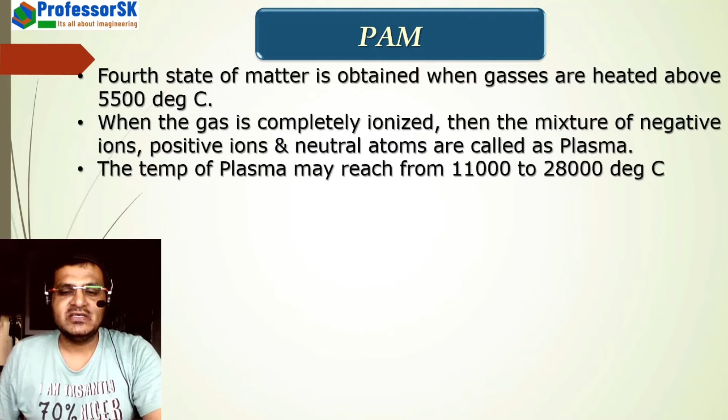So let us see the principle of the plasma arc machining. Fourth state of matter is obtained when gases are heated above 5500 degrees Celsius. When the gas is completely ionized, then the mixture of negative ions, positive ions and neutral atoms are called as plasma. The temperature of plasma may reach from 11,000 to 28,000 degrees Celsius, and this temperature is used for machining purpose in plasma arc machining.

Now let us see the setup of the same. Number 1. Plasma cutting torch. It is a tungsten electrode fitted in a small chamber. Next, tool and workpiece. In this process, tool is made as cathode and workpiece is made as anode.

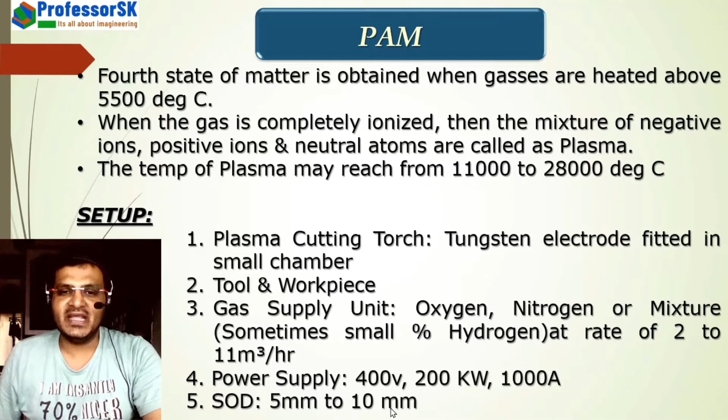Gas supply unit. Oxygen, nitrogen or mixture, sometimes small percentage of hydrogen at rate of 2 to 11 meter cube per hour is supplied. Power supply provided is 400 volts, 200 kilowatt power and 1000 amperes. Fifth, SOD means stand off distance is kept from 5 mm up to 10 mm in this process. This is the constructional setup of plasma arc machining.

Also, sometimes shielding gas is supplied. Now what is shielding gas? Shielding gas is providing a shield to the working area from the atmospheric air. It will create a shield over here and it will cut off the contact with the environmental air. These shielding gas can be noble gases like argon.

Also, circulating coolant water is provided in the nozzle for cooling the nozzle. So if the temperature is reaching up to 28,000 degrees Celsius, then there are chances that the nozzle also may get corroded. So to stop the nozzle from corrosion, cooling supply is provided.

This is the tungsten electrode. As you can see, that tungsten electrode is connected to power source. This is negative terminal and workpiece is positive terminal. In this area, plasma gas is produced, plasma arc is produced, and from this nozzle it comes out and falls on workpiece with a very high pressure.

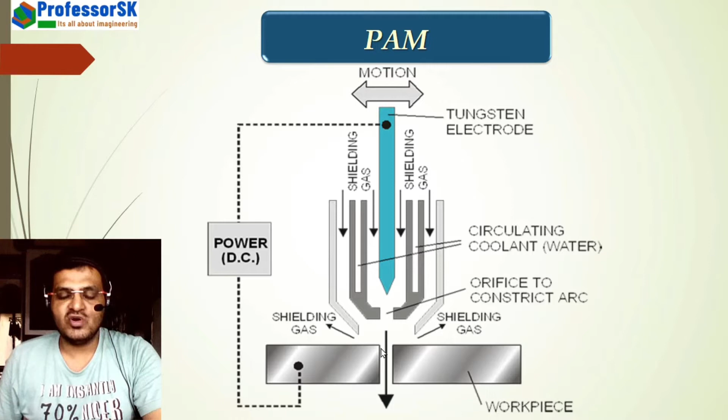Now let us see the actual process of plasma arc machining. When DC power is given to the circuit, a strong arc is produced between the electrode, cathode and nozzle, that is anode. Now you can see that here anode is connected to workpiece as well as it is connected to nozzle. So when the DC supply is provided, what will happen?

The electrons will travel from negative to positive. So it will go from cathode and they all will get allocated in this part of the electrode, tungsten electrode. Now as the voltage and current is very high, the electron will be very much saturated over here and they will try to jump off and go to a positive charge. Now what is the very next positive charge available over here? Yes, that is nothing but your nozzle, torch. So electrons will jump from here and it will go to the nozzle.

Meanwhile, what is present over here? There is a gas present. So electron will pass from the gas, and electrons have a tendency to ionize the medium through which they pass. So what they will do? They will ionize the gas present over here. Moving on, the gas, usually hydrogen, oxygen or nitrogen, is passed into the chamber. From here, this gas inlet, the gas is passed.

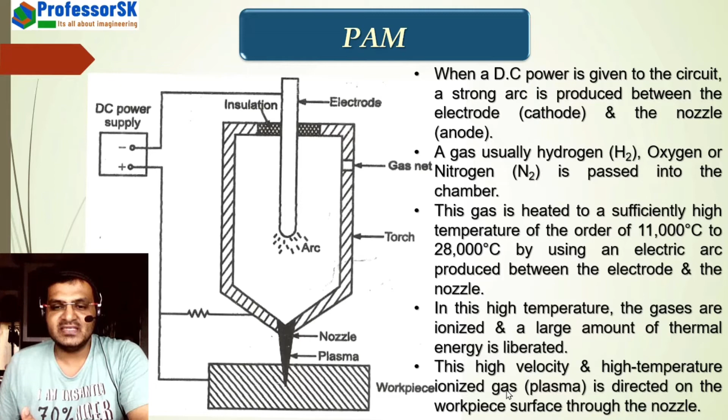Plasma jet melts the metal of the workpiece, and the high velocity gas stream effectively blows the molten metal away. See, plasma will melt the material, and as the speed of this plasma gas is very high, it will also blow away the molten material from the workpiece.

The heating of workpiece material is not due to any chemical reaction, but due to the continuous attack of plasma on the workpiece material. So it can be safely used for machining of any metal, including those which can be subjected to the chemical reaction.

One more thing, the complete charge of this plasma is negative because of electrons present, because of cations present, because of also neutrons present. So the major charge of this plasma is negative. So this charge will definitely go somewhere that has positive charge. So that is the reason we make our workpiece the anode. You can see over here.

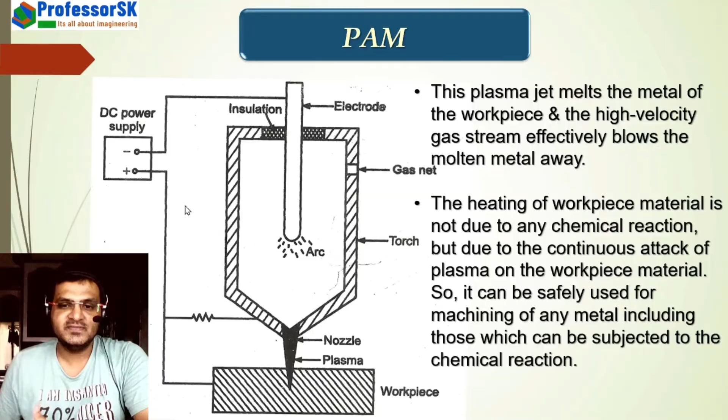Now let us see the process parameters of plasma arc machining. Metal removal technique used is heating, melting and vaporizing by using plasma. Work material: all materials that conduct electricity. So in this machining, only electrically conductive materials can be machined. Tool used is plasma jet. Velocity of plasma jet is 500 meters per second.

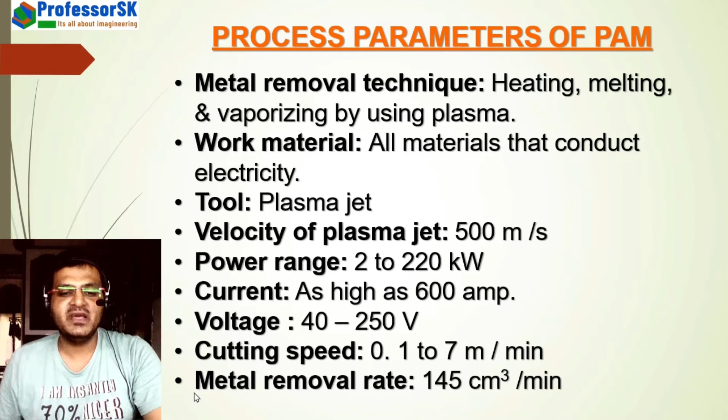Power range is 2 to 220 kilowatts. Current as high as 600 amperes. Voltage 40 to 250 volts. Cutting speed is 0.1 to 7 meter per minute. Material removal rate is 145 cubic centimeters per minute.

Now let us see the advantages of plasma arc machining. It can be used to cut any metal. Cutting rate is very high in this. As compared to the ordinary flame cutting process, it can cut plain carbon steel many times faster. Used for rough turning of very difficult materials. Due to the high speed of cutting, the deformation of sheet metal is reduced while the width of the cut is minimum and the surface quality is high.

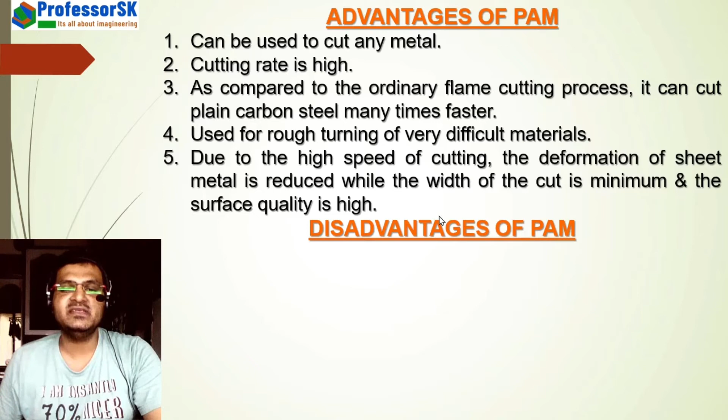Now let us see the disadvantages of PAM. Tapered surface is produced. You can see that this disadvantage is seen in almost all types of non-traditional machining processes. The reason being that the tool is at a distance, the standoff distance, from the workpiece. So that is the reason you get the tapering effect in machining.

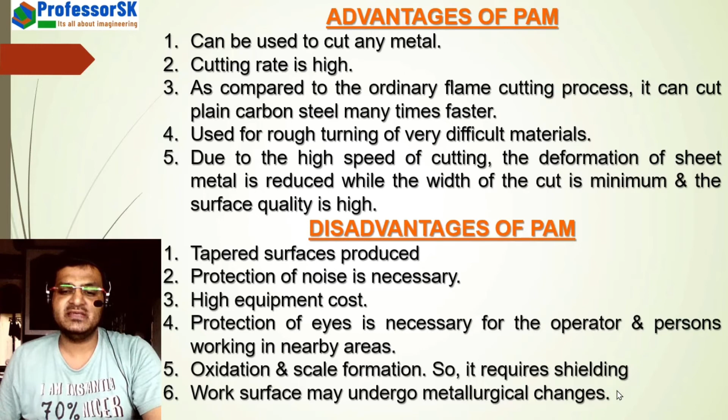Protection from noise is necessary. High equipment cost is there. Protection of eyes is necessary for the operator and persons working in the nearby area. Oxidation and scale formation is there, so it requires shielding. As I have told you, shielding gas is also provided. Work surface may undergo metallurgical changes as the temperature is 28,000 degrees Celsius. So there are some metallurgical changes happening in the workpiece.

Let us see the applications. It is used for cutting alloy steels, stainless steel, cast iron, copper, nickel, titanium, aluminium and alloys of copper and nickel, etc. Also it is used for profile cutting. It is successfully used for turning and milling of hard to machine materials. It can be used for stack cutting, shape cutting, piercing and underwater cutting also.

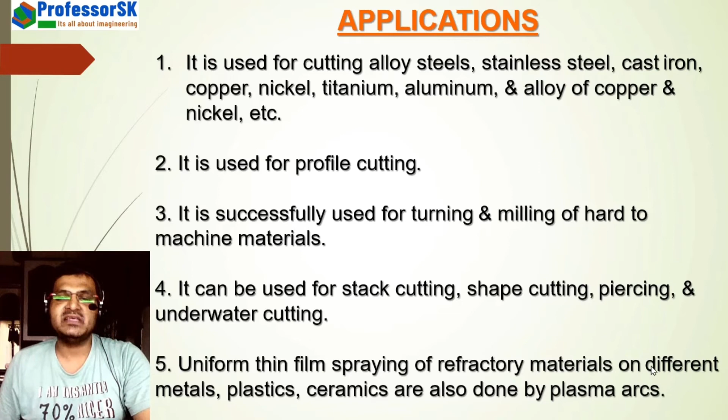Uniform thin film spray of refractory materials on different metals, plastics and ceramics is also done by plasma arc. So these are all the applications of plasma arc.

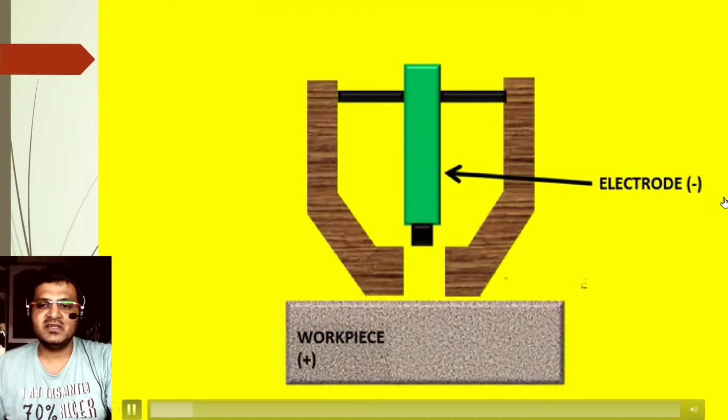Now let us see how it works once again. This is the workpiece, and on the workpiece this is your electrode, tungsten electrode. Tungsten is negative, that is cathode, and this is covered with a nozzle. From outside gas is filled inside. Workpiece is connected with anode and electrode is connected with cathode.

Now, as the electricity is passed, this will produce a spark with the nozzle, and because of that high temperature and ionization of gas, a high amount of plasma is produced in this chamber, and plasma directly strikes from the nozzle on the workpiece, and the temperature rises up to 28,000 degrees Celsius, which can directly machine the workpiece. Also, the velocity of the jet is very high.